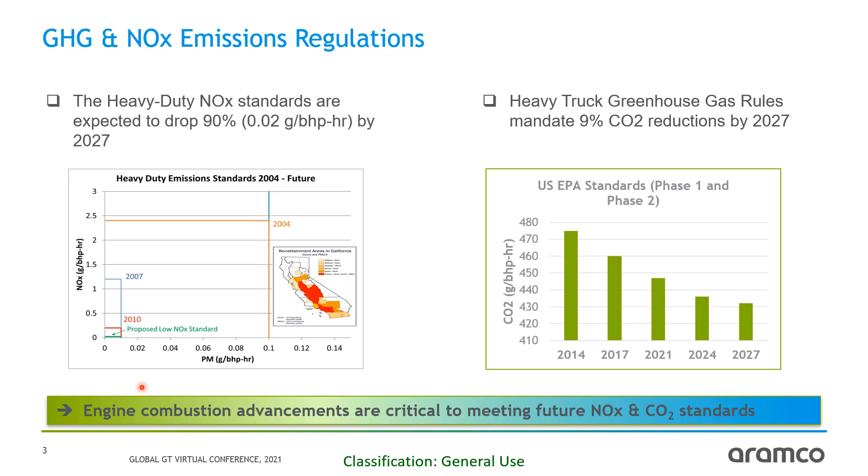The motivation for this work is driven by greenhouse gas and NOx emissions regulations. Heavy-duty NOx standards are expected to drop 90% by 2027 from current 2010 levels. Similarly, greenhouse gas rules mandate a 9% reduction by the same time. Reducing CO2 and NOx simultaneously is very challenging, and advanced combustion concepts are imperative to meet those requirements.

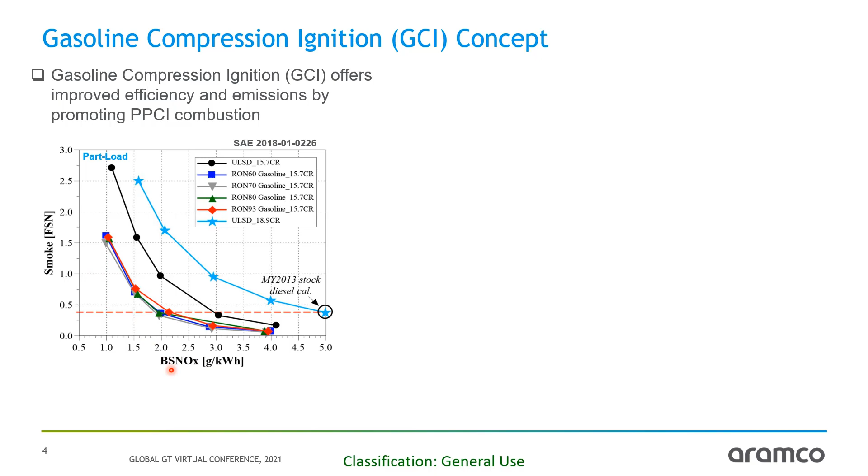Gasoline compression ignition (GCI) is one such advanced combustion concept that potentially offers improved efficiency and emissions by promoting PPCI combustion using gasoline's longer ignition delay. Published data shows that gasoline-range fuels show much improved NOx trade-off compared to diesel.

Over the US certification cycle, in the part load region where pressures and temperatures are controlled, GCI benefits are very favorable. However, low NOx requirements demand high boost and EGR, which demands an efficient air handling system.

At high load conditions, in addition to low NOx, there is a challenge for PPCI combustion promotion due to elevated pressures and temperatures. Here, technology like variable valve actuation can be used to control those pressures and temperatures and leverage gasoline's ignition delay for PPCI benefit.

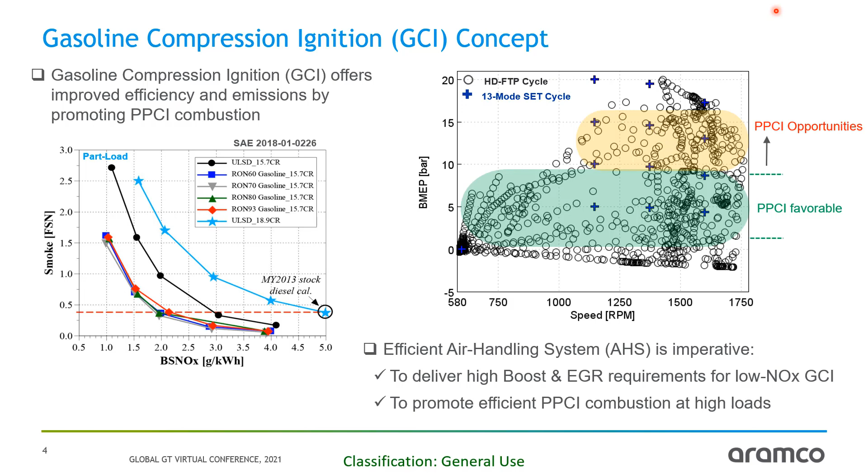However, VVA further burdens the air handling system performance. Hence, the objectives in this work were threefold.

First, evaluate detailed air handling system configurations to deliver the aggressive flow requirements while minimizing gas exchange losses. Then the selected candidates were analyzed for system response time and flow delivery using transient simulations by GT and co-simulation integration. Next, the best air handling system candidate was evaluated for Miller cycle benefit at high load conditions.

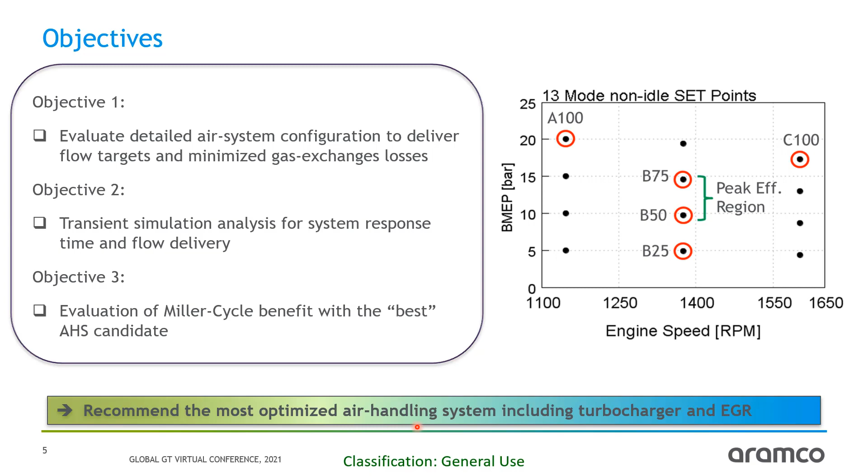The engine conditions that were investigated are shown in this figure and highlighted. The overall goal for this work was to recommend the most optimized air system, including turbocharger and EGR, that can meet the requirements for low NOx heavy-duty GCI.

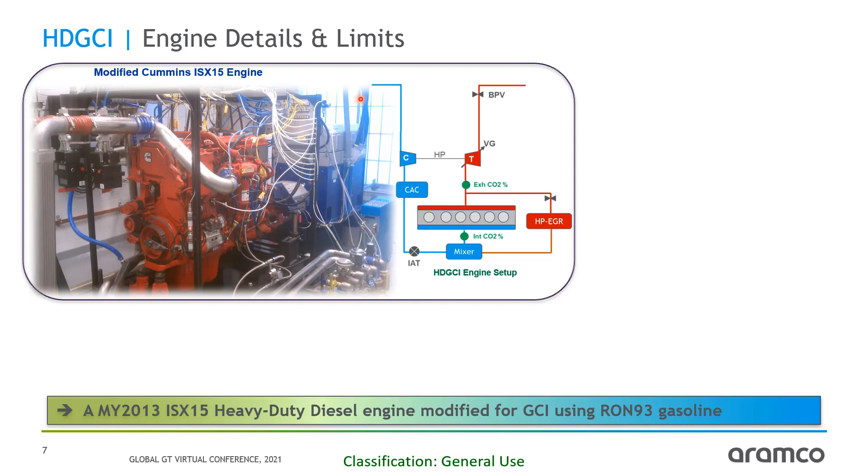Prior to results, let's look at the engine setup and the simulation methodology. This is a modified Cummins ISX15 heavy-duty engine.

For simulation, we are looking at a state-of-the-art engine system analysis. This is a quick snapshot of the experimental validation of the 1D engine model and close coupling of 1D and 3D CFD modeling methodology that helped ensure high fidelity of GCI combustion trends such as charge mixture composition, pressures, and temperatures at intake valve closing, as well as in-cylinder pressure trace predictions by the 1D model.

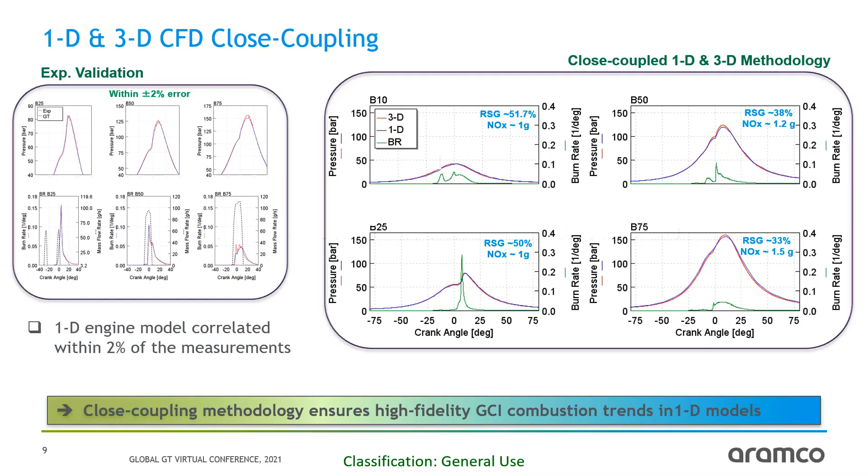Let's start with objective one, steady state air handling system analysis. Here we used a 1 to 1.5 gram engine-out NOx target for gasoline range fuel at compression ratio 16.5. For those, the EGR and boost targets were noted very high compared to the stock diesel calibration at 18.9 compression ratio, which maintained NOx levels from 3 to 4 gram NOx.

To meet these aggressive flow requirements, we investigated the following boost system candidates: single stage variable geometry turbocharger, single stage wastegated turbocharger, and a two-stage production turbocharger. For each of these turbochargers, we used 3 different EGR configurations.

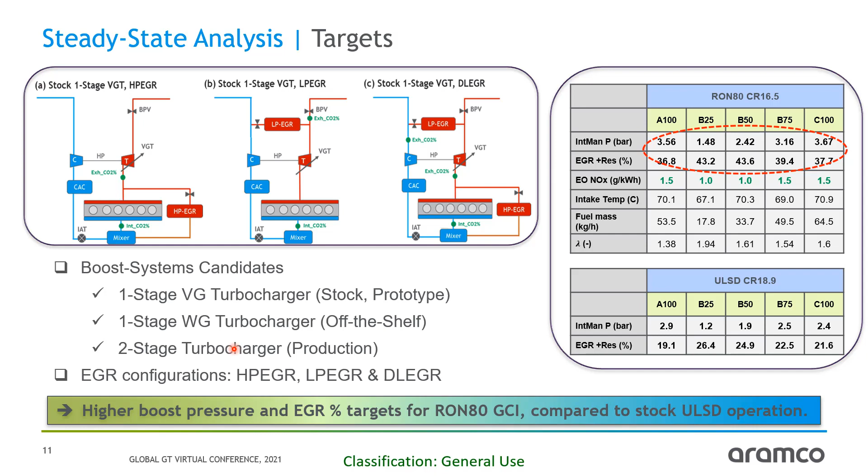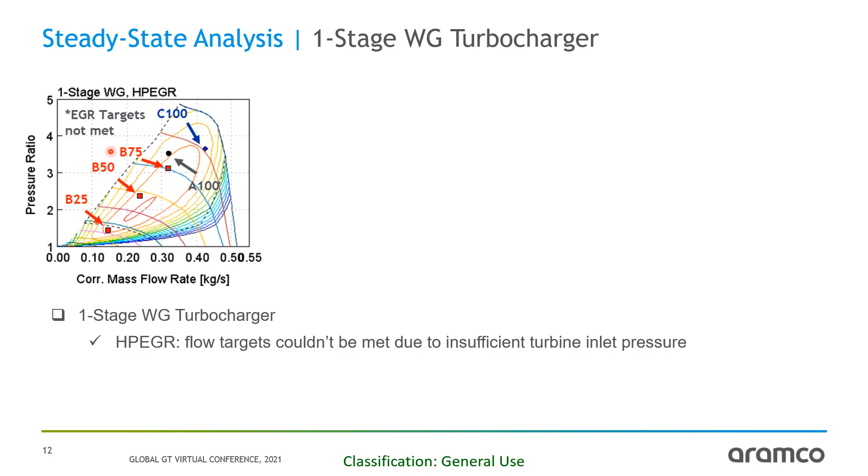The performance of the single stage wastegated turbocharger, when integrated with the high pressure EGR system, showed inadequate delta pressure to drive EGR, and hence the flow targets could not be matched.